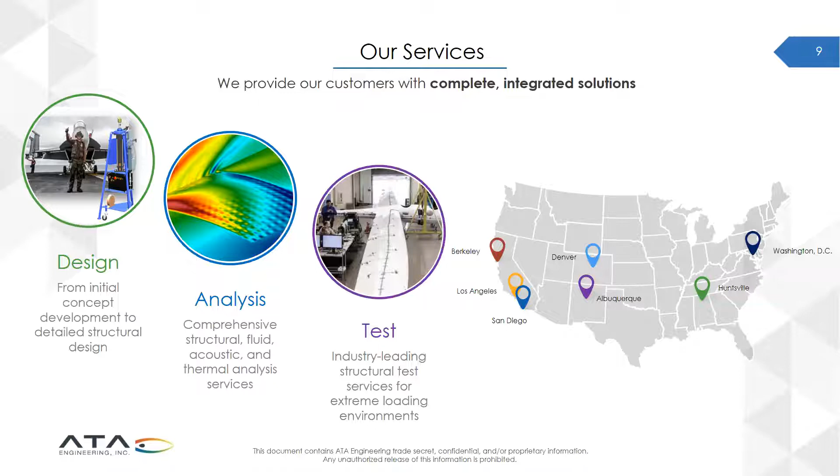Some people aren't familiar with the history, and this will be quick, but basically ATA used to be a division of SDRC a long time ago, and in 2000 became its own company called ATA Engineering, Inc. Since then, we have grown across the US into those offices, and we've also grown our relationship with Siemens to the extent we're very close for our VAR relationship, selling and supporting Siemens, but also a very special relationship on the NX side and Femap, because of our history through SDRC and that relationship with Siemens.

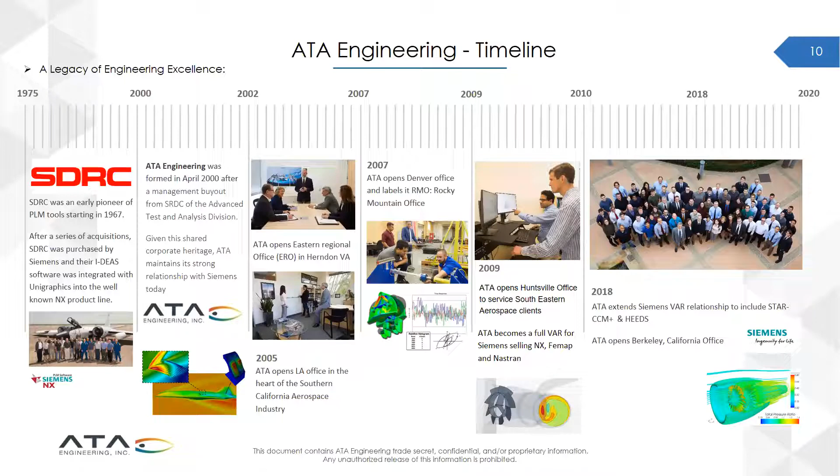As a platinum value-added reseller with Siemens, we do a lot of work with their software. We do support, software implementation, training, and we're also one of the nation's preferred training providers for many of the tools, including NX and Nastran.

So today, our key topic is STAR-CCM+, and really what we're going to be talking about is STAR-CCM+ and CFD used in hypersonic flows. Just to set the scene a little bit, ATA uses two predominant codes for CFD here. One is LOCI-Chem, which is a university code from Mississippi State, and the other is STAR-CCM+. We'll be contrasting those a little bit.

For me, I'll be talking a little bit more about STAR-CCM+, because it's more general CFD, a multi-physics solver. What makes it different to LOCI-Chem in this context is the workflow and the level of automation it can achieve in a production environment, really making it much more productive for design of experiments and optimization projects. So we'll see that in a minute.

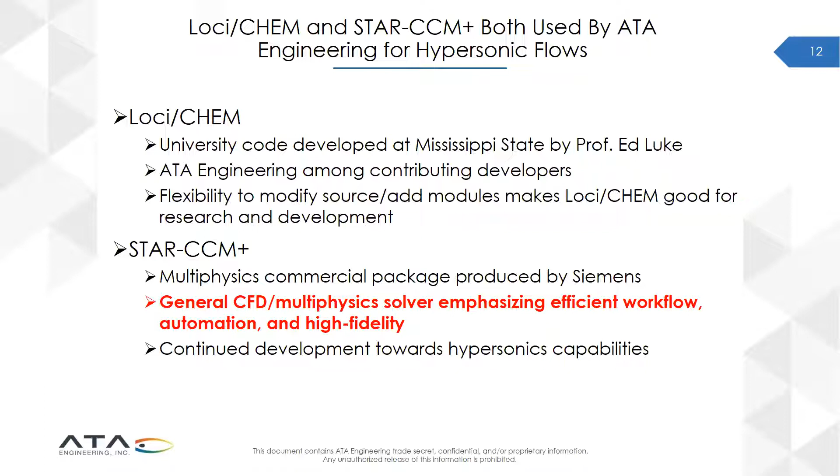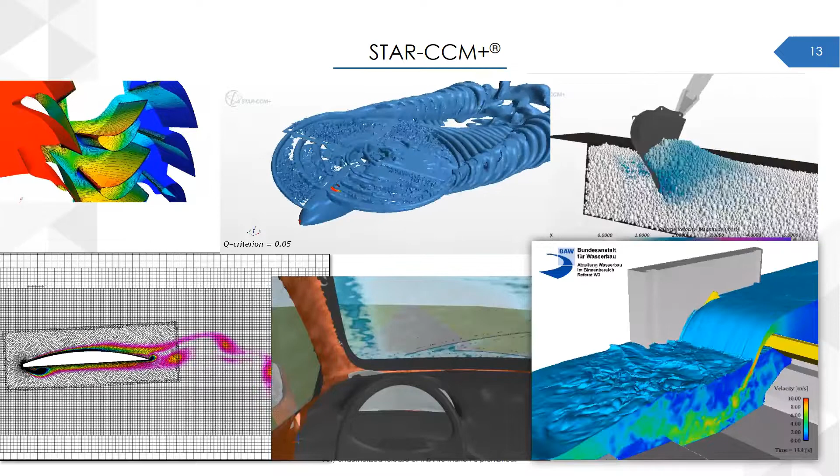So just to really highlight how generic STAR-CCM+ is, here's a smattering of the types of applications it can cope with, from aerodynamics and hypersonics through multi-phase and discrete element modeling, fluids and free surface flows, even automotive and ice flows. It's really a complete general purpose CFD tool that happens to do lots of things very well, including hypersonics.

And it's also very easy to automate. This is admittedly for a ship model, but it highlights that geometry and CFD models can be wrapped into an automated loop. If you want to optimize design and shape, there's really no better tool available. This is an example of modeling resistance around a ship done with HEEDS and STAR CCM Plus, evaluating hundreds of different designs with no man in the loop, to really leverage the power of both CFD and your compute environment to get results much faster.

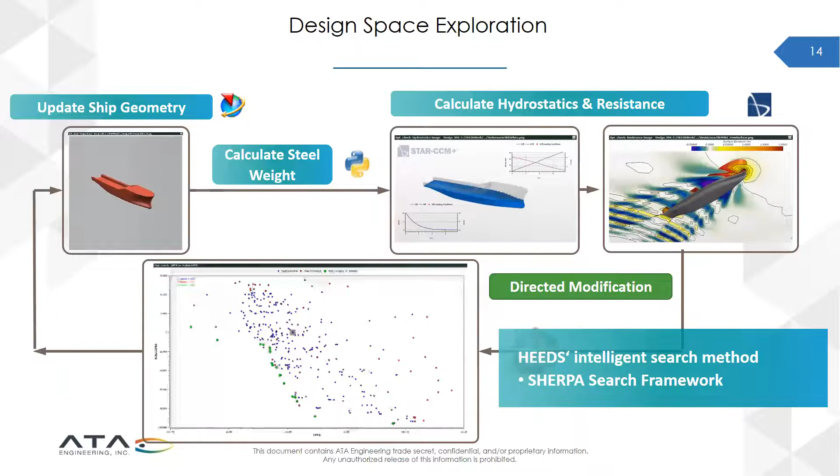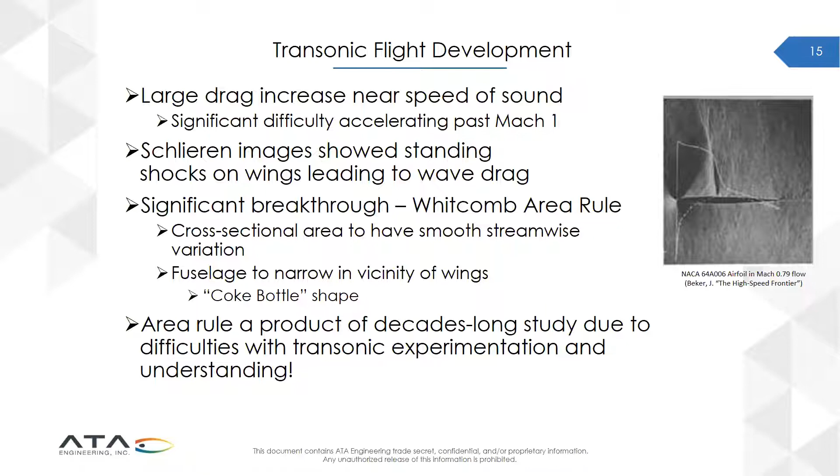So a few years ago, Chris and I did another webinar about aircraft from the 50s not being able to break the sound barrier because of geometry problems in the aircraft fuselage. The Whitcomb area rule came about after many years of work on that, and we tried to emulate that using STAR CCM Plus and HEEDS. We created a HEEDS optimization of a supersonic fuselage, making the geometry parametric to look at different cross sections across the fuselage shape.

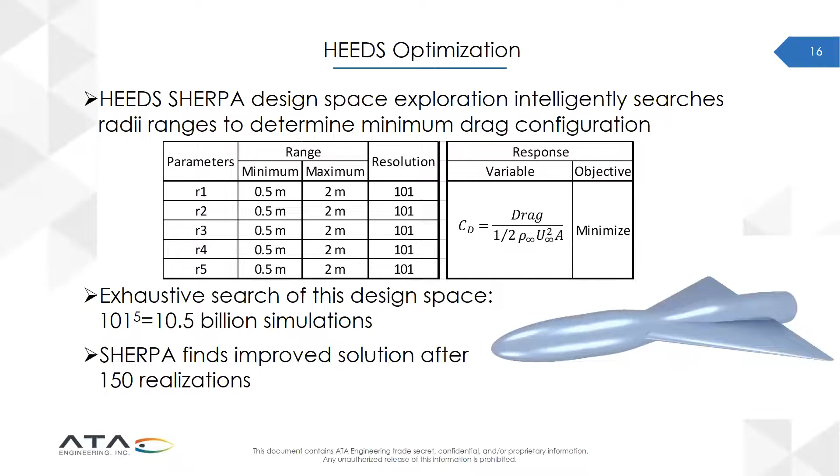If you look at this as a full design space, it's 101 to the power of 5 possible simulations, obviously unattainable to do CFD on all of those. But using HEEDS with its Sherpa algorithm, we cut that down to 150 simulations to try and find a better design. Again, it was automated, no man in the loop, and HEEDS was able to run this supersonic aircraft fuselage within a matter of hours.

It was able to reduce the drag coefficient down by 38%. So the idea was that all of that work that took years and years in the 50s was included in about 9 hours to do this run, and it came up with a similar answer.

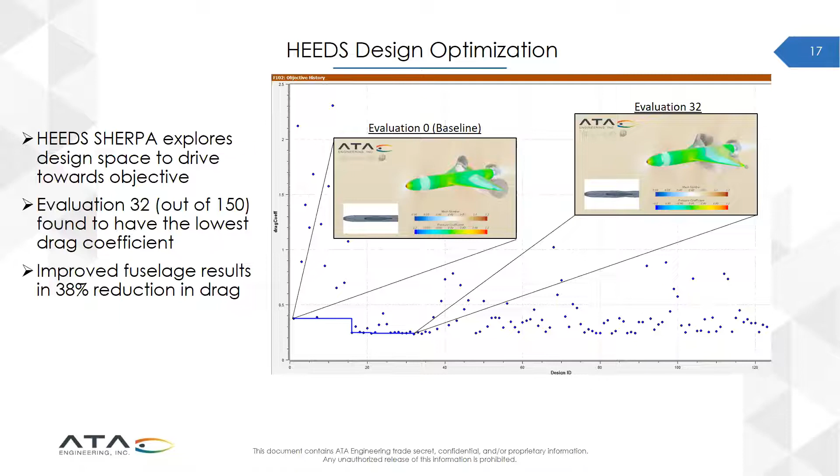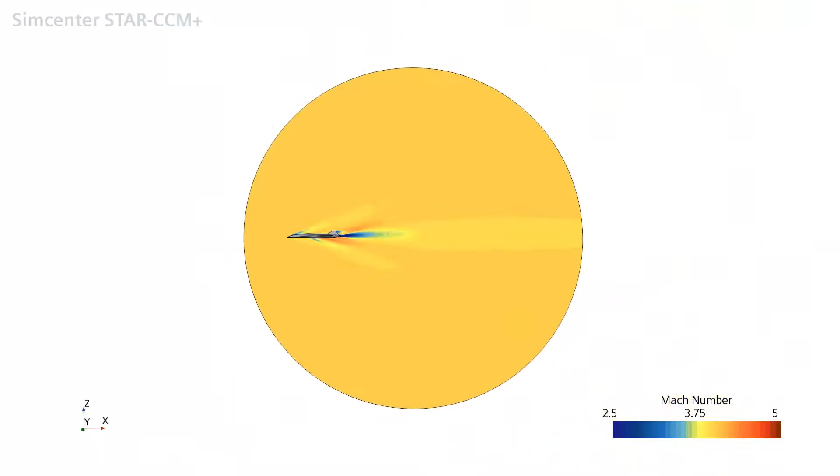And so while you're thinking about this animation, which is part of some of the work that Chris has been doing more recently, imagine not just doing a single CFD model of a hypersonic vehicle and looking at those results, but also running hundreds of them as an optimization or design of experiments run to really home in on better designs.

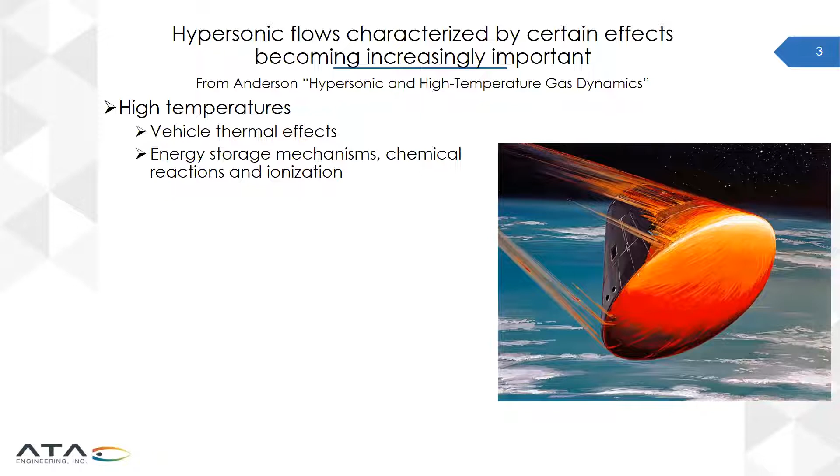And the implications of this can be that your vehicle is subject to much higher thermal loads, and also the flow can be affected by changes in energy storage mechanisms, chemical reactions, and ionization at high temperatures.

Also, in many hypersonic flows, or many hypersonic situations that we care about, there are low density flows, sometimes making the continuum equations invalid, so you have to resort to particle methods. Or there are some cases where both continuum and particle methods can be used in different regions of that flow.

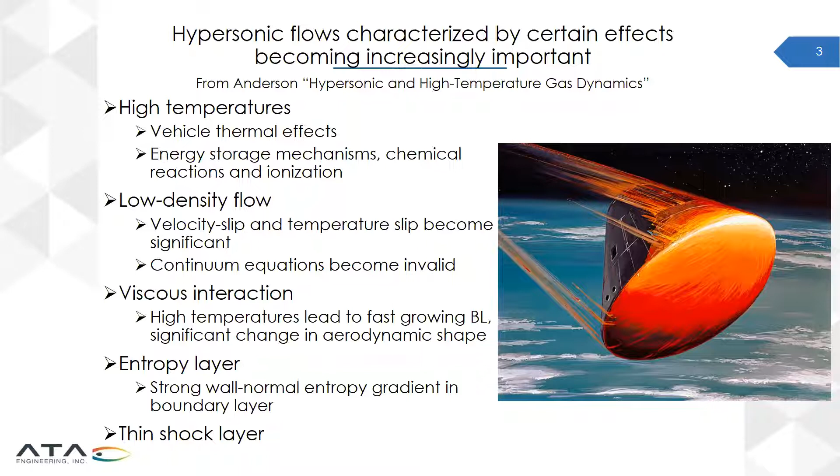There's also viscous interaction, which causes an accelerated growth of the boundary layer down the length of a vehicle, and this can affect the aerodynamic shape of the vehicle and change the way it interacts with the flow at high speeds. There's also the emergence of this entropy layer, which creates a strong wall-normal entropy gradient in the boundary layer, and thin shock layers at very high hypersonic speeds.

Most of the time when we're doing continuum CFD, what we're all focused on is really this item at the top, the high temperatures, and that's what I'll be touching on a little bit in this talk.

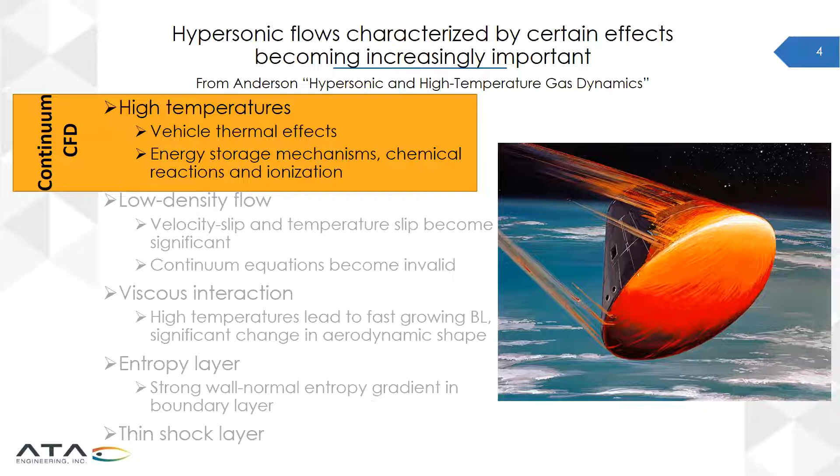So just briefly, I want to talk to you about some of the things that ATA Engineering does in hypersonics.

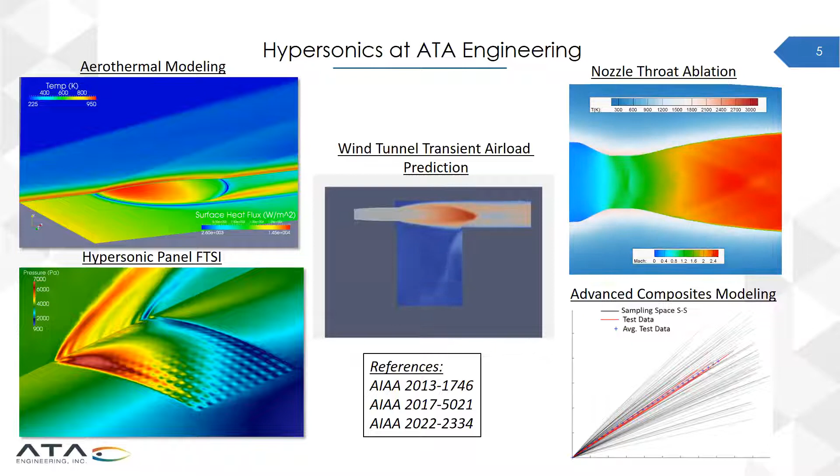As Adam mentioned, at ATA we use primarily two CFD packages, Loci/CHEM and STAR-CCM+. We use them, as they are both very capable tools, in different situations. One aspect of Loci/CHEM that's very attractive to us is that we can modify the source code and add modules so that we can tackle the very hard and esoteric problems we're interested in, and we've actually been developers of Loci/CHEM for a long time, working with Professor Luke. Then there's STAR-CCM+, which, as you can tell from the introduction, we'll focus mostly on today. It's a multi-physics commercial package that emphasizes efficient workflow, automation, and high fidelity with a large range of physics models.

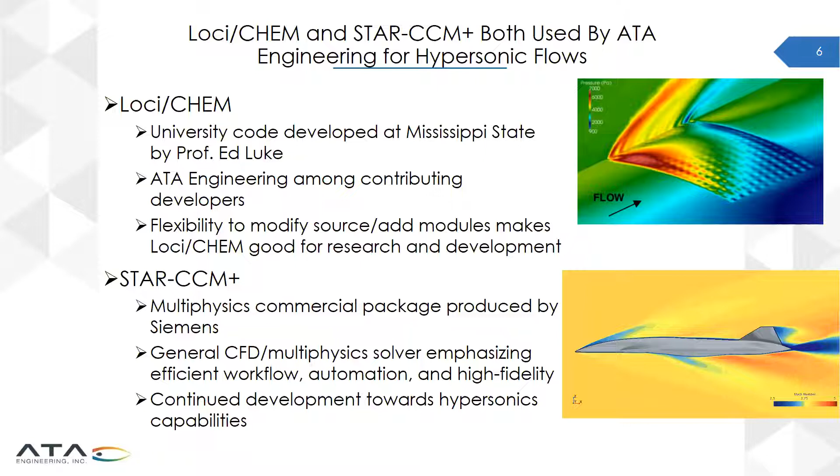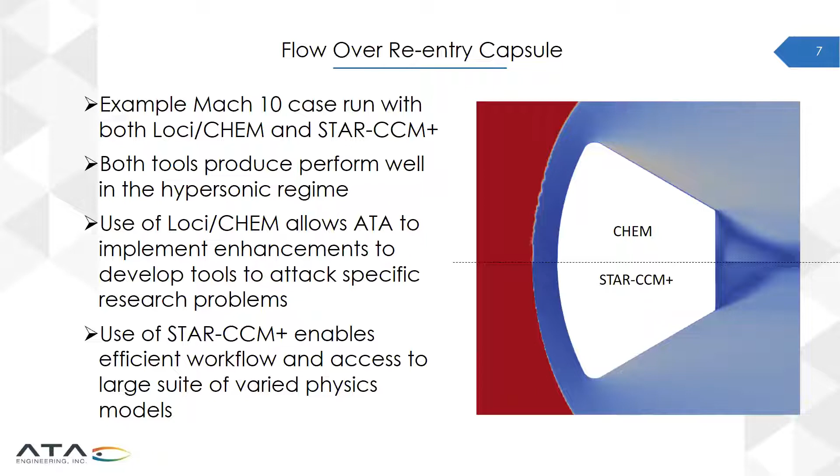So I'll start by getting into some best practices related to meshing.

As I've mentioned previously, surface heating is a large concern in the design of vehicles for use in the hypersonic environment, and that's why we use these prism layers on solid boundaries, so that we can generate very high resolution in the wall-normal direction to capture the large flow and thermal gradients there.

If anybody is aware of this phenomenon called the carbuncle phenomenon, you can also use prism layers at the front of, say, a bluff or blunt body to align the mesh with the shock there, by creating prism layers that are thick enough to envelope the shock, and that can help ameliorate the carbuncle phenomenon.

We also at ATA recommend a wall Y+ value of less than 1 to really capture the very high thermal gradients you see at the surface of the vehicle in hypersonic flows.

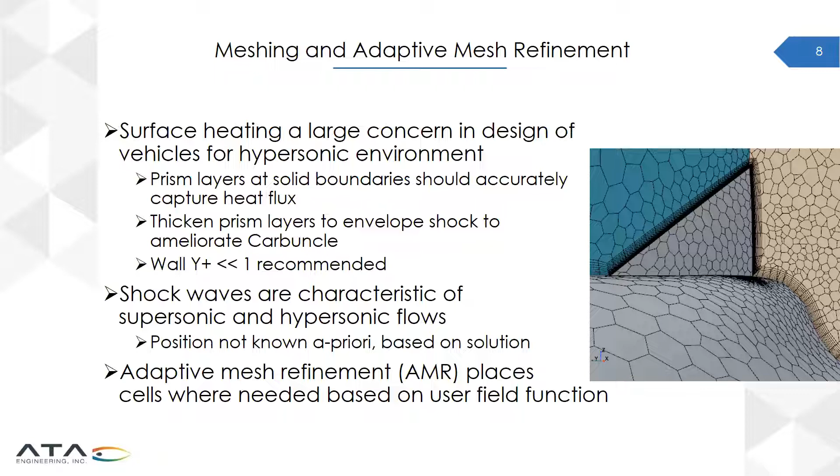This is where adaptive mesh refinement, or AMR, comes into play, because it adaptively changes the mesh to place cells in regions of high gradients.

So a little bit more about how that is implemented in StarCCM+. AMR, in this case, will respond to a user-defined metric to identify unresolved gradients. An effective user-defined function for this will quantify the gradient of the flow across one cell. I've got it written out here: you take the gradient of some flow variable f and multiply it by a cell size, and then you can say, okay, now how much do we want to limit the amount that flow variable changes across one cell?

Kind of a busy slide here, but I've shown it in this XY plot, where on the original mesh, say we've got one cell from x equals 1 to x equals 2, and the flow changes by 2. If we were to cluster, using AMR, some points around that region, you can resolve much higher gradients in the solution than you would on the original grid. This has implications for the shock strength and the entropy generation downstream of the shock.

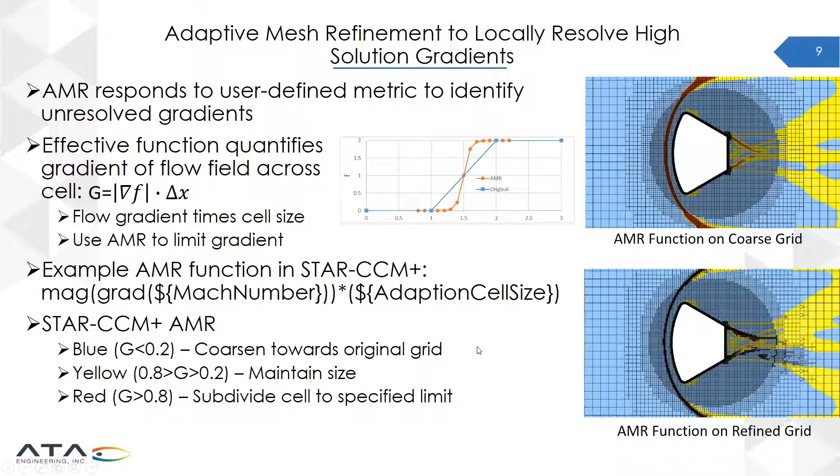Now moving on to turbulence. Turbulence in any situation is very complicated. In hypersonic flows, it becomes more so.

A lot of the time when working on problems in non-hypersonic flows, maybe a canonical shape, we can go back to our textbooks and say, for flow over a cylinder, we have this critical Reynolds number at which the boundary layer transitions from laminar, shown in the upper left, to turbulent, in the upper right. For example, in an incompressible flat plate, this transition Reynolds number occurs around 5 times 10 to the 5th. However, it's not that simple in hypersonics.

The transition Reynolds number, as shown in this equation, is a complicated function of multiple parameters—there are 18 in this equation. So the transition location is very problem specific, and as I'll show in the next slide, it's oftentimes inconsistent with observations and our experience at lower speeds.

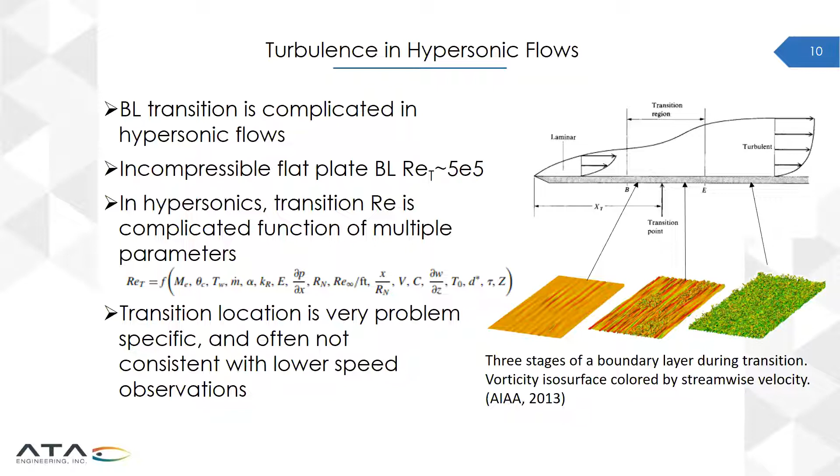So here are some of those observations. Somewhat non-intuitively, the transition Reynolds number can change with Mach number and actually become delayed at high Mach numbers. In this plot on the right, for a specific geometry, you can see that around Mach 4, at least for the solid line, the transition Reynolds number starts to become delayed pretty rapidly moving downstream on the vehicle.

One other interesting thing this plot shows is that the transition Reynolds number also increases with unit Reynolds number, meaning in higher density flows or higher velocity flows, the transition Reynolds number may increase.

Also shown in the figure in the middle, there are strong three-dimensional effects. In this case, this cone is increasing in angle of attack, and the transition on the windward side is being pushed aftward as the angle of attack increases, whereas on the leeward side it's being pushed forward.

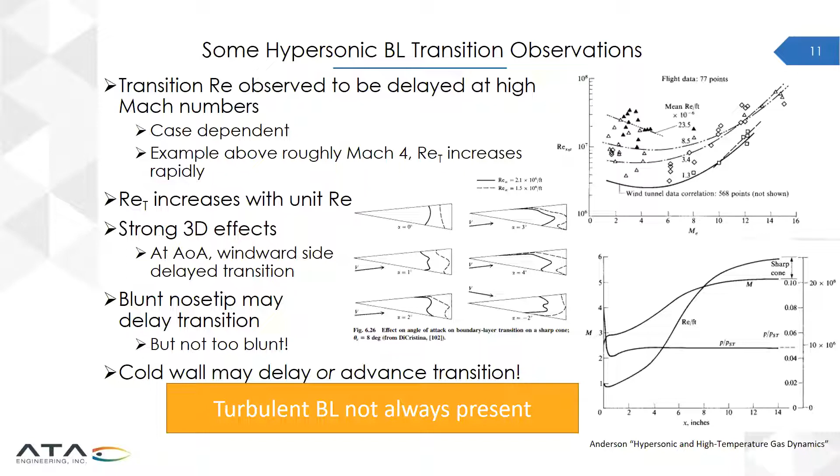However, if we are using a turbulence model, there are some recommended settings, at least for Star CCM Plus. The recommended model is the K Omega SST model with the A1 coefficient set to 0.355. This, as shown on the right from a NASA report, was shown to better predict the separation location and extent of that separation bubble.

Also, it's recommended that you use a quadratic constitutive relation, or QCR, which better accounts for anisotropy and secondary flows.

And then for these specific simulations, it's best to specify K and omega explicitly in the initial conditions and boundary conditions, in various regions, from what their default values are. So the recommendation is K, or turbulent kinetic energy, is 1 times 10 to the minus 6 times the velocity squared, and dissipation rate is 5 times velocity over some characteristic length for the problem. So these values, for instance, for a Mach 10 flow at 70,000 feet over a 1 meter vehicle would be 9 and 1.5 times 10 to the 4 respectively, and these are very different from default values.

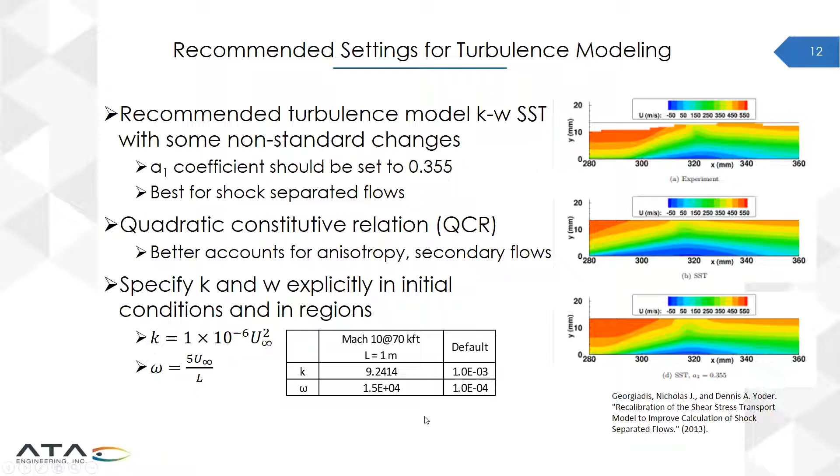So moving on to solver settings to mitigate inaccuracies and the carbuncle phenomena. I mentioned briefly the carbuncle phenomenon on a previous slide. What that is: in some cases, mesh misalignment with the flow solution can produce spurious vorticity and shockwave deformations, which propagate downstream and create oftentimes uneven wall heat flux on your vehicle. And so these are numerical and not physical, and you want to get rid of them.

So the developers at Star CCM Plus have made modifications to their AUSM flux vector splitting scheme to help out with that issue and correct for the mesh misalignments that lead to the carbuncle phenomena. It's also recommended that you use the MUSCL third order differencing scheme, and it's recommended that the default AMG solver tolerance, which is 0.1, be reduced to 0.001 to really ensure that you're converging at each iteration and avoid error stack up.

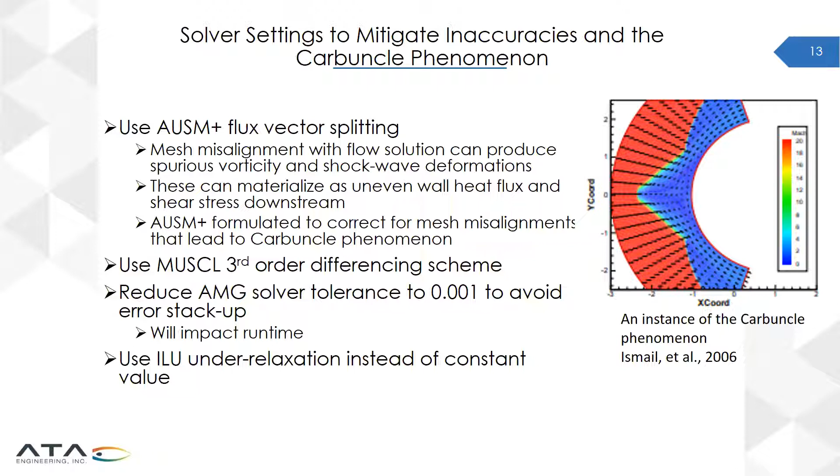This will impact runtime, so you have to weigh what you're more interested in for that particular problem. It's also recommended that you use ILU under relaxation instead of a constant value.

Also, in these hypersonic cases, as we've kind of hammered on, they're difficult. One good way to get a usable solution and get it quickly is to start with a good initial guess at what the solution is. The solution will oftentimes diverge if we just start off by plunging our vehicle into a bath of hypersonic flow. So starting with a good initial condition is a good idea.

And in Star CCM Plus, there's a grid sequencing initialization setting that helps out with that. So what it does is it uses a multi-grid technique to solve for a good initial condition. I illustrate this on the right. This isn't exactly what happens, this is just my manually generated grid illustration of what's happening.

But a series of coarse meshes are generated off of the fine mesh that you create that you want to solve your solution on. An approximate solution is computed on the coarsest grid, and after either a number of maximum iterations or until some convergence is reached, that's then interpolated onto the next finest grid, and so on until you reach that initial fine grid that you generated, and hopefully have at that point a good initial condition for your simulation.

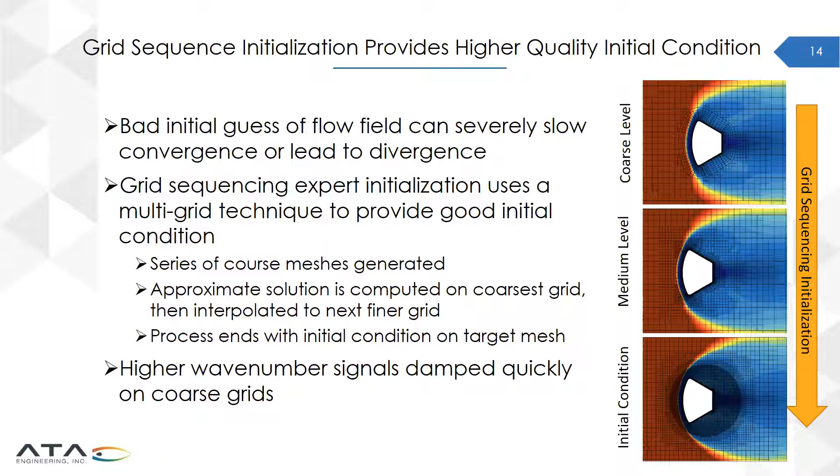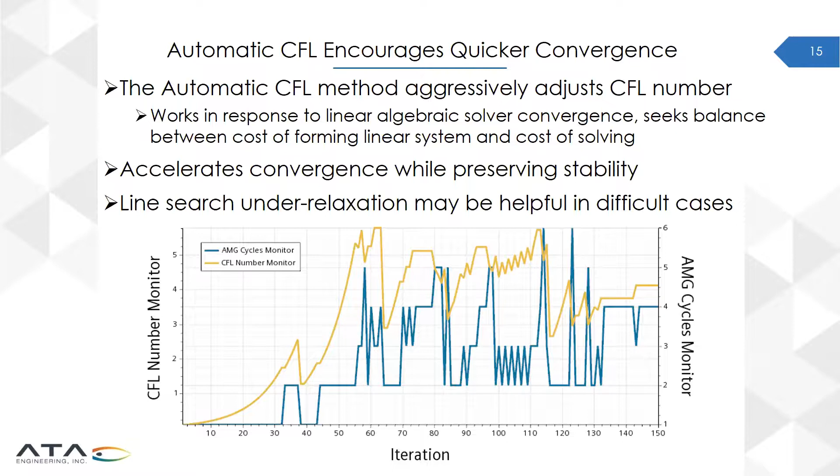Now, I'll briefly speak about the physics models for high temperature hypersonic flows. At high temperatures, the effects of various internal energy storage mechanisms, dissociation and ionization become significant.

Around 800 Kelvin, the vibrational energy storage mechanism becomes excited so the specific heats can no longer be assumed constant, and are more accurately described as functions of temperature. Above 2000 Kelvin, oxygen starts to dissociate, and at 4000 Kelvin nitrogen begins to dissociate. Above 9000 Kelvin, you start to ionize the air.

For these simulations in air, StarCCM's recommended model is the equilibrium air model. It's important to note this doesn't explicitly solve for dissociation and ionization, but instead uses curve fits that account for chemical reactions and ionization, and modify the energy, specific heat capacities, and transport variables as functions of temperature and pressure.

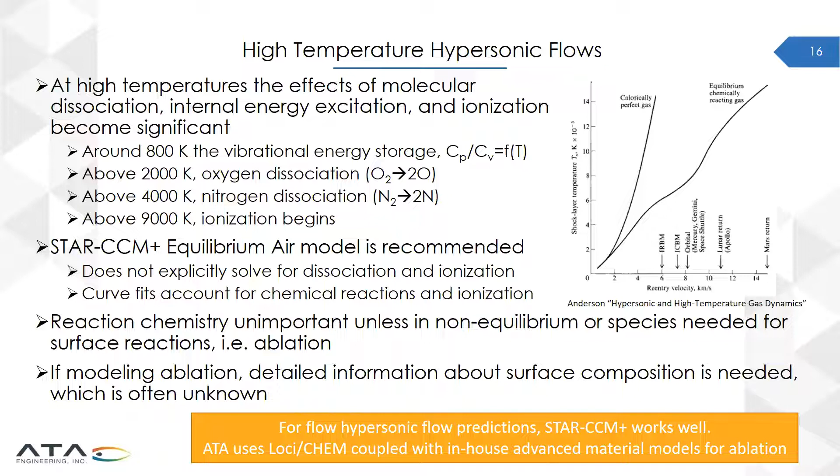And then it's got powerful and robust solvers to converge on the solution as quickly as possible, and post-processing tools.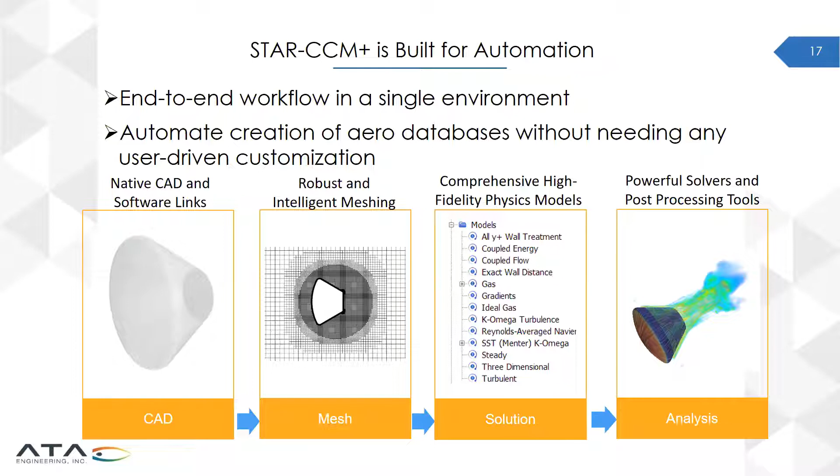So in this case of this reentry vehicle, just one example I want to show. I ran this over a portion of last weekend on my desktop computer, and really just set the problem up and hit go, and STAR was able to make whatever geometry modifications are necessary, mesh it, use AMR to produce the highest quality mesh as the solution evolved, so that we have this mesh which really resolves this bow shock.

And then when it detected convergence, it went and saved my solution.

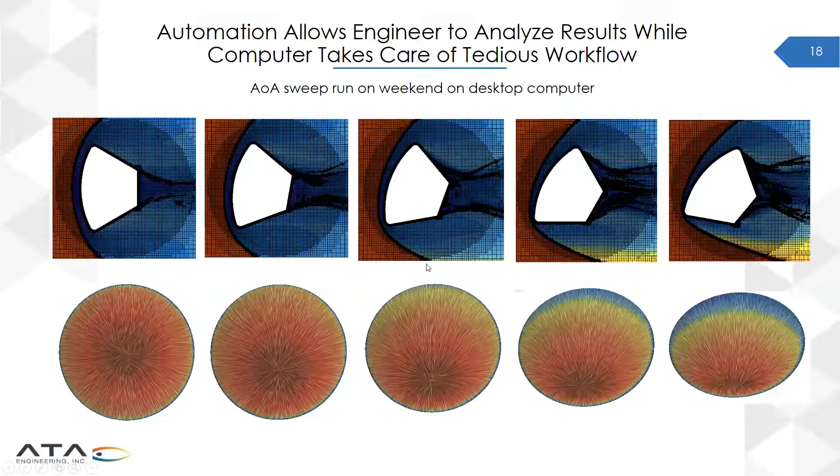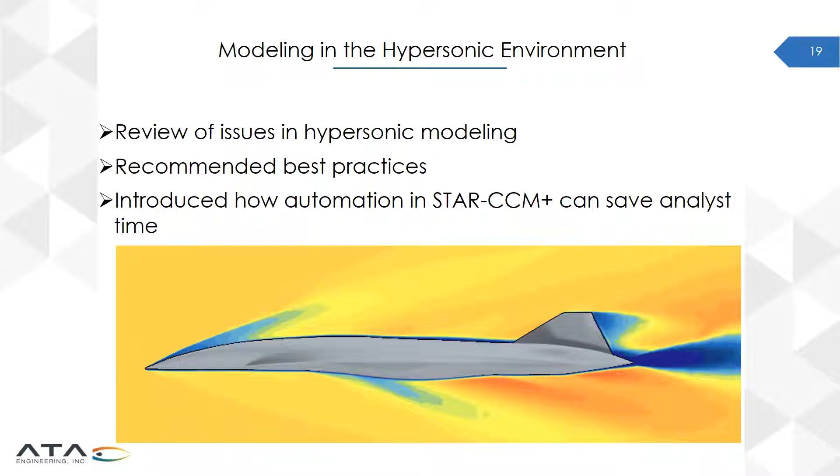So just in review, in this talk we've reviewed some of the issues and challenges in hypersonic modeling, and I've given you the recommended best practices for attacking these problems in StarCCM+, and given you a taste of how STAR-CCM+ can save analyst time, so we can spend time doing our engineering work and let the computer take care of all the tedious workflow tasks. So that is the end of my talk.

I can pass it back to you, Adam. Excellent. Or I can take any questions.